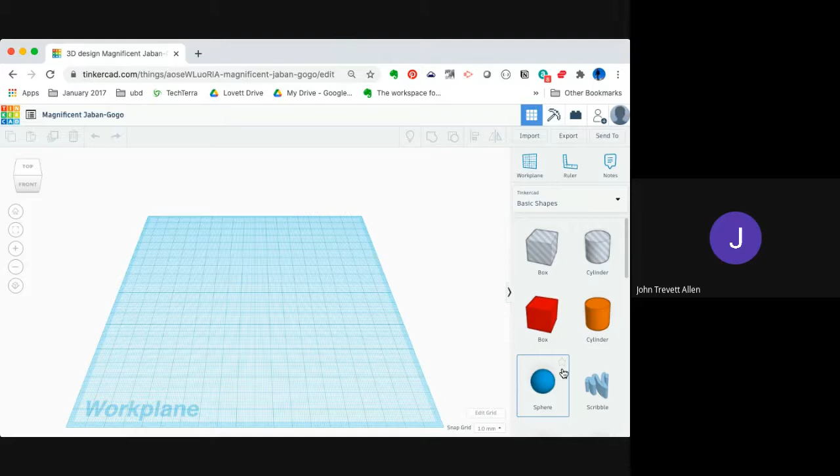It'll probably be maybe a cylinder. Let's use a cylinder.

Okay, so the first thing to do is to recognize that down here at the bottom are these numbers. I don't know how big your actual controller is, but it's probably not that different from about 8 centimeters by 5 centimeters. So I'm just going to use this.

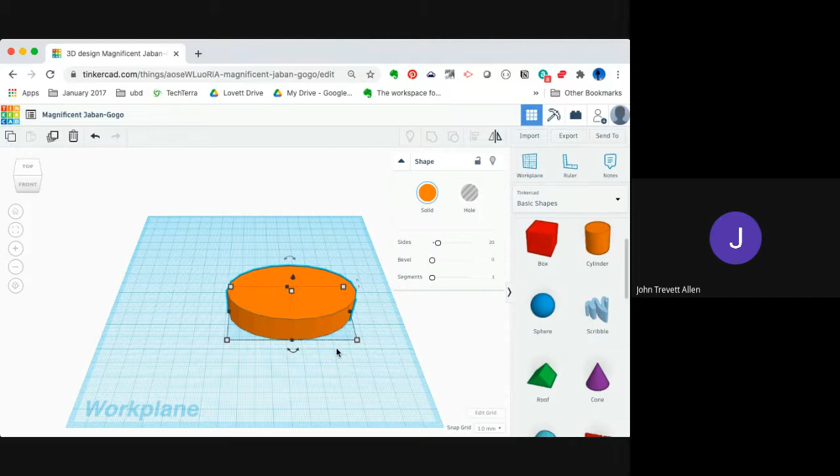You can actually measure your controller. And then...

I'm going to put in. Mr. Allen, may I go to the bathroom, please? Of course. Okay.

And I know this isn't quite correct, but I'm just going to put this in and approximate, because really the goal for me right now is just to show you how it works.

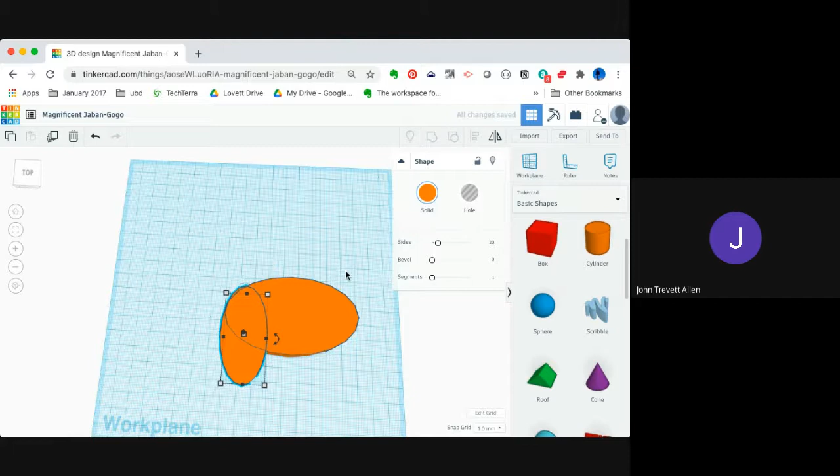So I'm going to hit Command C and Command V, and I'm going to have the two sort of arms of the controller, and I'm going to try to align them so that makes a non-bumpy shape. Does this kind of look controller-ish?

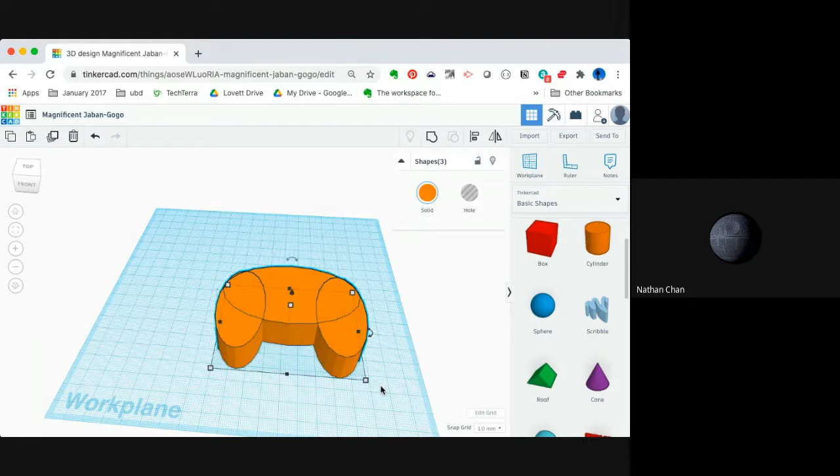So what I've done is I've grouped them. I've clicked this button here that's group, so now all three objects become one.

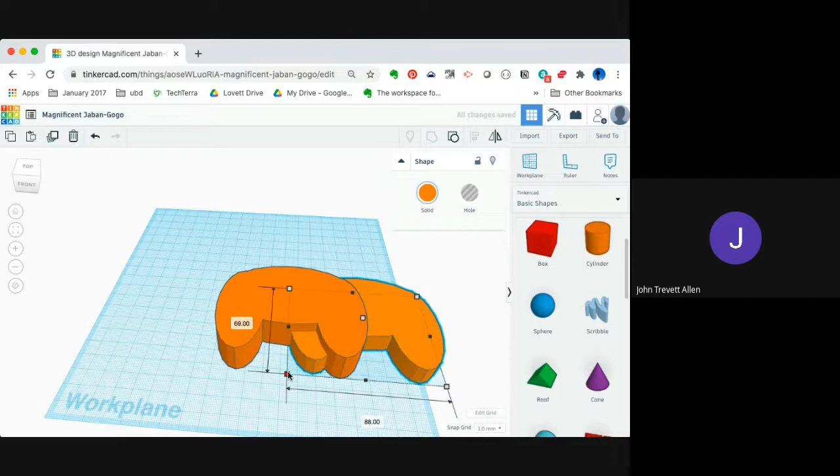The first thing I'm going to do is Command C and Command V, and then I'm going to shrink it by about 7 millimeters and raise it up a little bit.

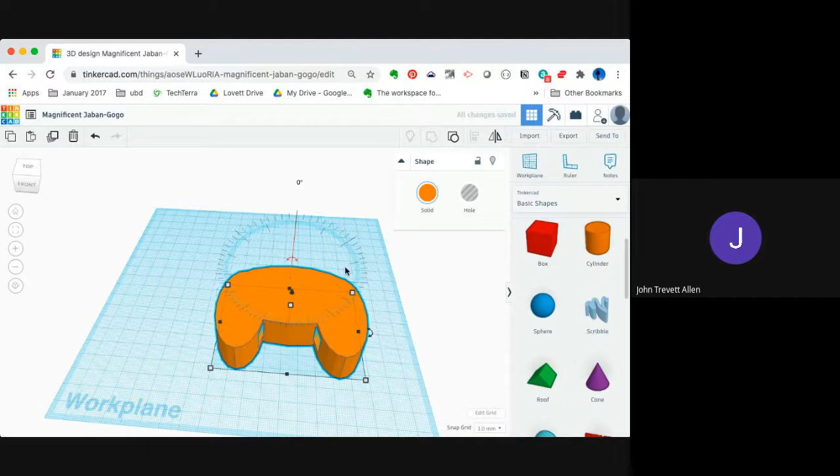And I'm going to go over here and turn it into a hole. What does that do, you may ask? I will show you. Now I've put that inside and I'm going to group these two, and that creates a hollow inside.

Now I'm going to duplicate this whole grouped thing, slide it over here to the side, Command C, Command V, and take a box.

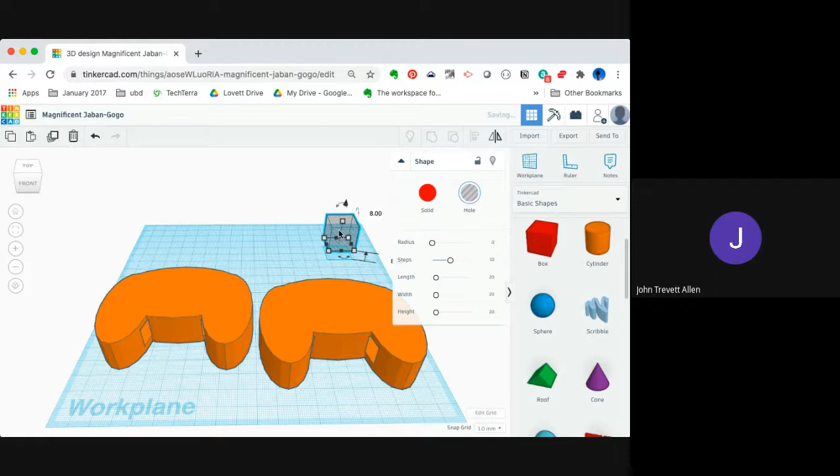I'm going to turn it into a hole and lift it up to what I think is about the halfway point, using this little black triangle.

Are you watching what I'm doing? Yeah. And so far it's making sense? Yeah. Okay.

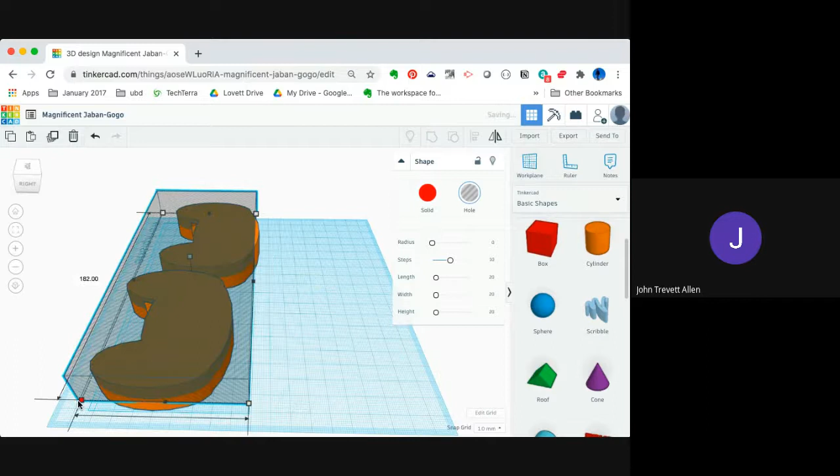All right, so what I'm going to do is delete about half of it using this hole.

And that's going to create, when I hit the group button, two hollow controllers. Now obviously one of them is going to have the holes for the actual buttons.

I'm not going to make much of an attempt to make them very much like buttons. But let's just say that, I don't know, let's go for 5 centimeter circles -- I'm sorry, 5 millimeter circles. That's a half a centimeter.

Now let's do it, well, 5 millimeters rather, half a centimeter. I'm going to turn that into a hole.

I'm going to Command C, Command V, Command C, Command V. How many buttons do I need? 4.

Okay, and then I'm going to create this, and I'm going to go to this little curvy thing, and I'm going to turn it. How many degrees? 90. You know exactly what I'm doing, don't you?

Yeah, you're making the direction pad. What am I doing? I am. And I'm not going to worry about whether it's correct, I'm just going to make it.

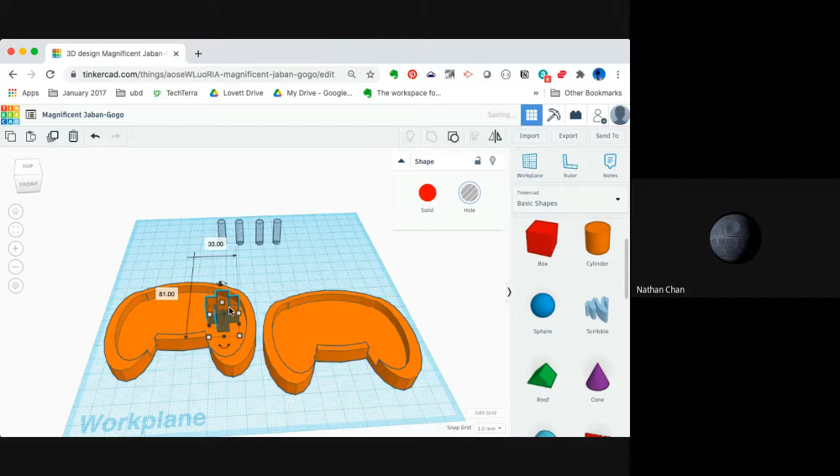Perfect. Why did I put it on the right side of the controller? Because that's the bottom half of it, so then when you flip it over, it will be on the left side.

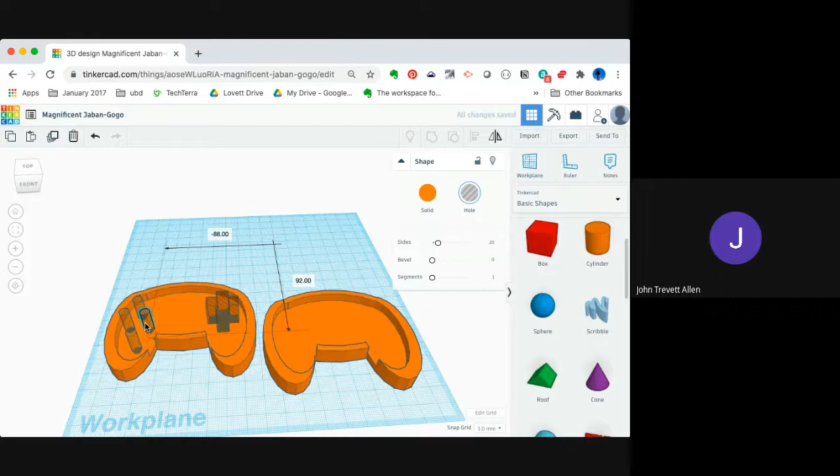Correct. All right. Now, again, I haven't even looked at a game controller in ages. I probably need to put the start and select buttons on there, but I'm just doing this to show you how it works, so I'm not going to worry about the details.

Now I'm going to make sure, look at it from the bottom. Now that's more or less correct. Again, I would actually measure my real controller and make sure the dimensions were correct.

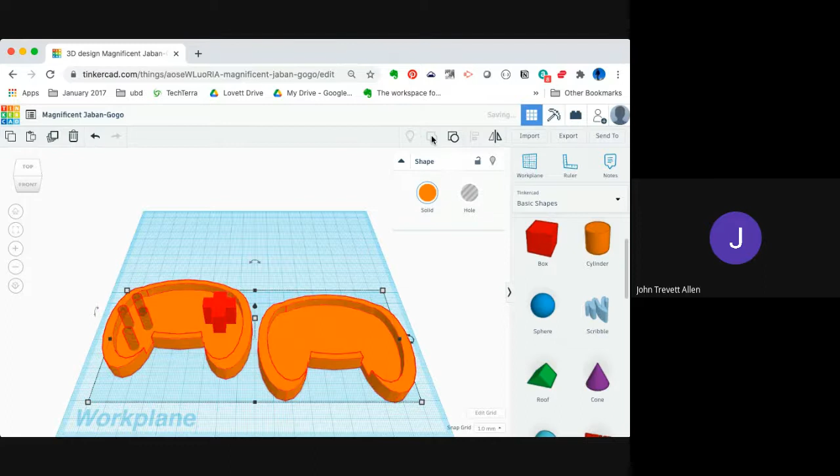And now I'm going to go up again to the group button. And now I've got my controller. So I could literally take, if I measured these properly, take apart a real controller and make my own.

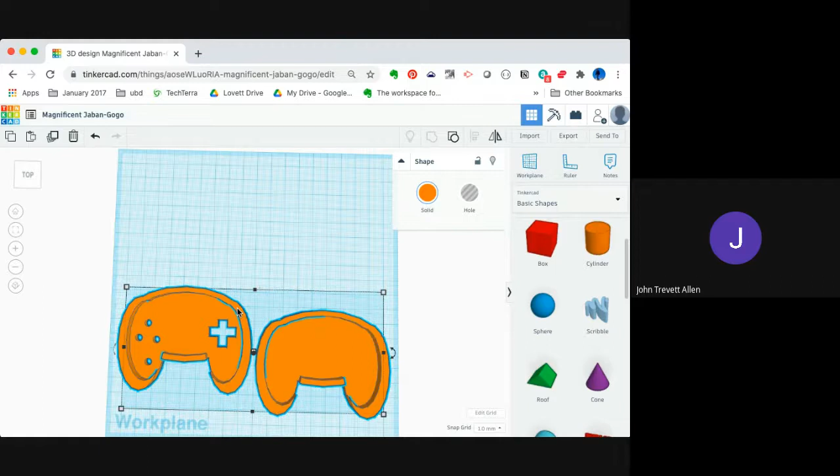I can also 3D print the parts that I just made and make my own buttons. I'd obviously want to shrink them down just a tiny bit so there's a little room so they move back and forth. But with this and a Makey Makey, which we have in the office, we could actually build our own functioning controller, and that controller would be much easier to use on a laptop.

But since there's plenty of Nintendo emulators out there in different hacker spaces, we could actually play some of our games and play with the controls in that way, and then remap whatever you want. So even if we can't remap the actual Switch, we can learn a process by which we can actually hack the whole thing.